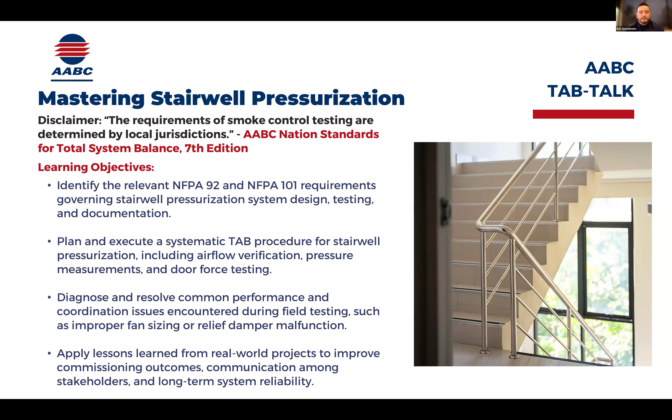What stair pressurization must do and why it is so important. This is a picture of the MGM Grand back in 1980. They had a fire, and my mentor, Michael Renovich, has always said, if you're ever going to be in a fire, you're going to want to be in Las Vegas. Why is that? Because out of this fire came national standards for smoke control. What they found in this fire is that 80 plus people passed away, and I think only about 15 or 16 passed away from actual exposure to flames. Everybody else passed away from smoke inhalation.

It is extremely important, as we found out with this fire and moving into the standards, that smoke control is the primary factor that we're trying to look at. When we're talking specifically for stairwells, what are we trying to do? We're trying to keep the smoke out of the stairwells because the stairwell is the egress in an emergency. So if we have an emergency, we have a fire, the stairwells are going to be the escape route for the majority of the occupants.

So we're trying to keep smoke out of there, trying to keep that clear so that they have a clear path to get out during the fire. The other things we're going to talk about too is keeping doors operable, and that pressurization should never make it too difficult for anybody to open the doors into or out of the stairwell.

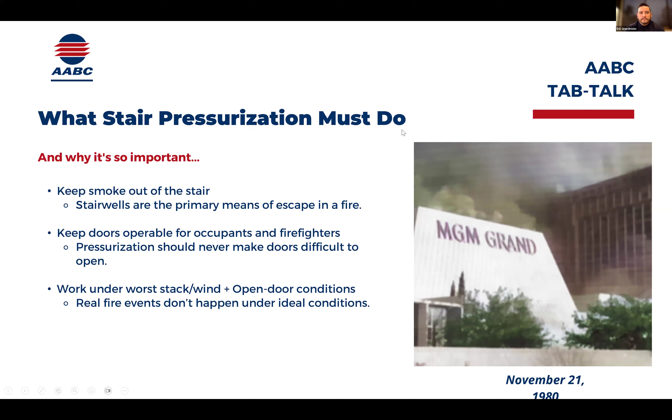So the NFPA 92 is a standard for smoke control systems. This is more of an engineering document, if you will - kind of a basis of design of what engineers need to be looking at as they're designing smoke control systems. We are going to be focusing in on just stairwell pressurization and kind of the TAB approach.

And so underneath just the stairwell for NFPA 92, we're going to be looking at required differential pressure across doors. We're going to be talking about door force limitations - where is that, how far can we go? Most enact a 30-pound door force, right?

But that's really broken into three parts: it's the break of the door hardware at 15 pounds, put into motion is going to be the 30 pounds, and then all the way open for 15. So the maximum we want to see in that whole process is a 30 pound limit.

Now, there are some ADA requirements that we've seen here in California that require 15 - you can only go to 15 per the ADA requirements. So that is now the new limiting factor in some buildings. We talk about the open door conditions - how many open doors is the system designed for, and airflow limitations.

So once again, this is not the code, guys. Just like ASHRAE 170 is not a code, this is more of a standard, what we're trying to design to. ASHRAE 170 is called a standard, so we're trying to design to that. In California, which is what I know mostly, the California Mechanical Code adopted ASHRAE 170 as Table 4A into their CMC. So we see that NFPA standards are adopted into a lot of local jurisdictions.

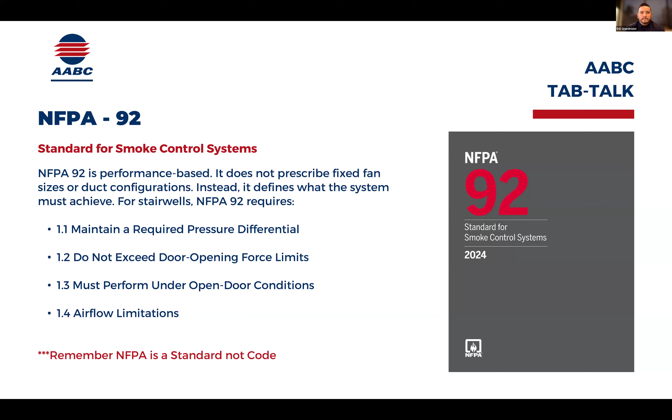So starting off on that differential pressure that we were talking about for each of the stairwells - they do have different requirements for sprinklered and unsprinklered systems. Sprinklered buildings require a 0.05 differential pressure from the corridor into the stairwell.

Now, we also have to take into account if there are vestibules. If there are vestibules, they require a 0.05 differential pressure across the corridor to vestibule and the vestibule to the stairwell. So we really need a total of 0.1 cascading pressures. Depending on the type of systems installed in the building, and also if you have vestibules or not, it changes the requirement we're looking at.

The other thing is this is different, and you'll see a lot of - I think IBC, and a lot of you may work in jurisdictions that have adopted the IBC.

IBC does have a maximum pressure requirement that they don't want to exceed, 0.35. NFPA does not actually show a maximum pressure. It just says you have to stay under your door force, so that's basically your limiting factor of how far you can go at a maximum.

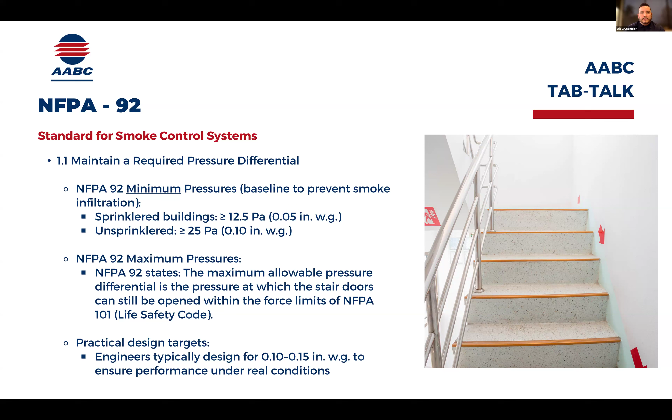We talked about this a little already, but the door force limitations and maximums that are set are actually by NFPA 101. NFPA 101 identifies the door force maximums, and 92 has adopted basically the NFPA 101 standard.

Recapping, most jurisdictions we're going to see that 30 pounds of force, and they break it into three factors: the unlatching or breaking of the hardware being 15 pounds or under, 30 pounds to start movement or set in motion, and then 15 pounds to fully open.

I've seen this tested in a variety of ways. I've seen some local jurisdictions, the AHJ, which is typically for us the fire marshal, come out, and as long as you go through the entire motion of opening the door and it doesn't exceed that 30 pounds of force, they say okay, you've passed.

I've also seen where you reset in each of these motions where they want to see you break it. If it's a panic bar, they want to see the panic bar break under 15 pounds, you show them the force, you reset. Then they want to see it start in motion to make sure that doesn't exceed 30 pounds, you reset, and once you get the full motion, they want to see that be 15 or under.

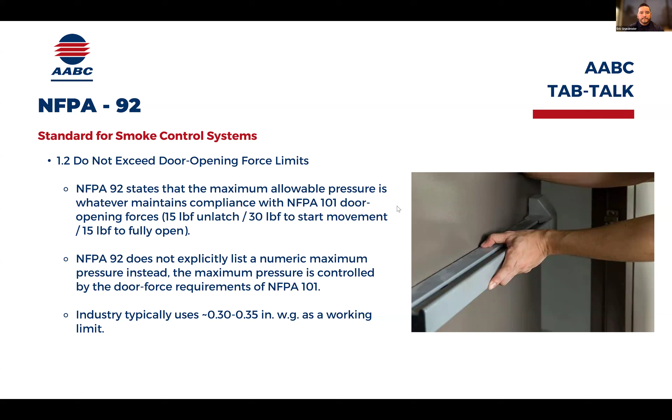One of the things that comes up is, what is the system designed to do? The rational analysis is usually done by a fire engineer. That's what we've typically seen. The fire engineer looks at the building, the requirements, local jurisdiction, and comes up with a smoke control plan.

Underneath that smoke control plan there are a lot of testing requirements done by the test and air balance contractor. They look at how many doors they're going to design the stairwell to be open at any given time. This is in theory though, because in most cases, if there's a fire, every single door of that stairwell is going to be open. No system I've seen to date can keep the pressure at 0.1 with every single door open, it's going to be kind of panic chaos.

So they design it with a criteria saying you're either going to have one or two doors open, and sometimes during testing they want to see, if we open one door, what happens, and can the system accommodate for that.

There's been some different ways we've seen that be accommodated. I had one instance where they tried to control the differential pressure from the stairwell to atmosphere based on a PID loop. That PID loop had to be very fast, and it was problematic to say the least, trying to maintain 0.1 with all the variables was very difficult.

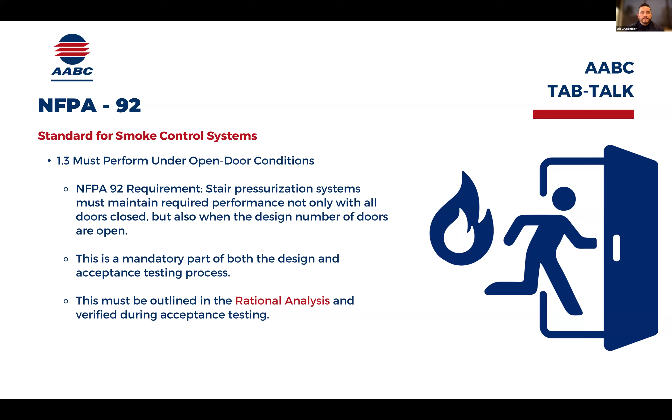So what is a rational analysis? This is what a fire engineer typically does - they go through the documents, look at the building, and come up with an analysis of what needs to be done. What are the requirements for smoke control within this building? How are we going to accomplish the NFPA requirements? They come up with a document that basically shows this, and it's given over to the local jurisdiction, in our case the fire marshal, depending on the building. Sometimes it's a state fire marshal that has to go through this plan and give it an approval. So NFPA 92 requires that they have this analysis for each building.

Over the years, sometimes we've been able to find it, especially if you're doing any kind of retrocommissioning or retesting. Sometimes it's difficult to find this analysis, but it's important that you try your best to find it because it's really going to show you how the system is designed and what we're looking to accomplish with the smoke control plan.

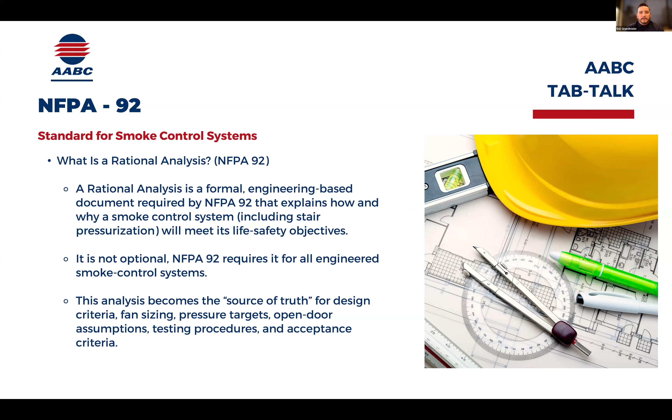There's also an airflow limitation they talk about in NFPA 92, and it's 200 feet per minute. In systems where I've seen this tested, it's not necessarily in the stairwell application - where I've seen it mostly tested is for smoke evacuation. You have to have makeup air for smoke evacuation, and sometimes they use doors that access the outside as their means of makeup air for the smoke evac fans. They don't want the air coming through the doors to exceed the 200 feet per minute because they don't want to create any type of turbulence or draw that would feed the fire.

So it's a limitation they're trying to keep slow as it comes in, to not disrupt what's going on, but also be able to use the smoke evac fans to get all the smoke out of the area. We're not going to talk too much more about that because it's really more pointed towards the smoke evac fans than it is about stairwell pressurization.

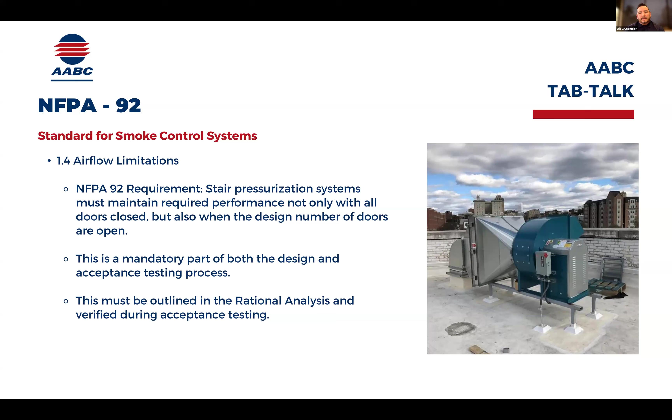We talked about this already, but just the one crossover from NFPA 92 to NFPA 101 is the door force requirements that they've given - it's the 15 pounds to unlatch, 30 to start movement, and 15 to swing fully open. And we went over that earlier.

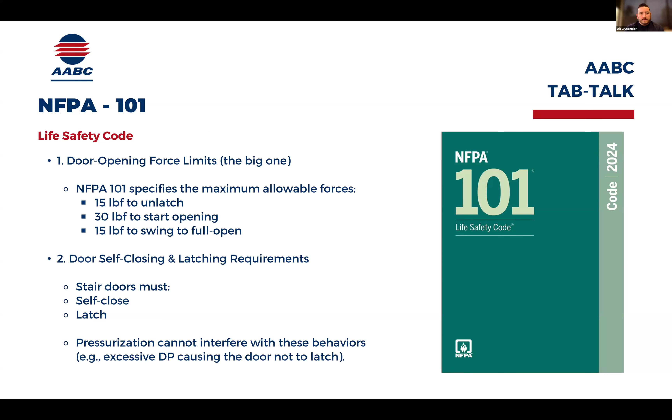So the systematic approach to TAB procedures - this is kind of the step by step. As you get involved in a project, what are the things you're going to be looking at? How are you going to go from each of these phases?

Now, I have a Rubik's Cube here. One of the things I've always used as an example for smoke control is that it's a puzzle, right? We're trying to put this puzzle together. There are different requirements that all adhere to the stairwell. A lot of times you're going to have to set that relief fan, set the pressure to the stairwell, go through cascading pressures and setting for your door forces. So there's this kind of puzzle that you have to put together. If anybody's ever done a Rubik's Cube, there's algorithms you can use to actually complete it. I've always looked at smoke control in that way - it's a puzzle, and there are algorithms we can use to get through it.

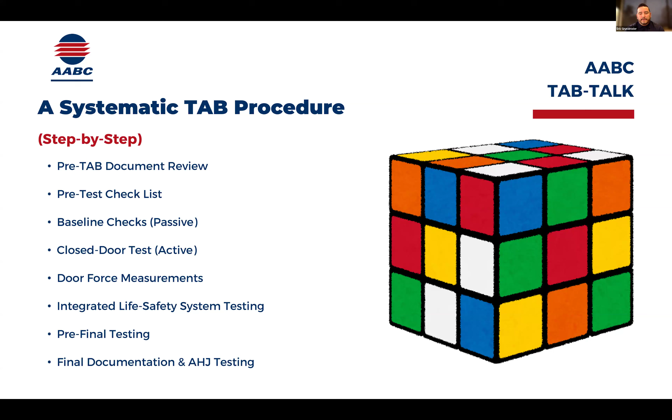And how does one twist and turn affect the other? Because as we'll talk about, if you set your pressures higher in your stairwell, that affects your door forces, right? So all those things play a part - they all interact with each other. We'll go through this step by step, what to expect, what to look for, and going through the process, especially from the TAB side and the TAB approach.

The first thing we're going to want to do is figure out what the system is supposed to do. We're going to want to go through the construction documents, the specifications, and look at the fire plan or the smoke control plan to see what we're needing to do. We're going to want to confirm the acceptance criteria, like the 30 pounds versus the 15-pound ADA requirement. What is being enacted? Those are some questions that definitely need to come up in the beginning.

We like to talk about those things early on with the team, especially the mechanical team, but we may also need to bring in the general construction team, because one of the things that always seems to be missed is the adjustable door sweep. Especially if you're working with a vestibule where you're going to have cascading pressures from the corridor to the vestibule to the stairwell, you need adjustable door sweeps. A lot of times that's missed because they're specking the door for operation, not thinking about smoke control.

So those are things you've got to talk through and make sure are in place, because you don't want to get to the end of the project, go to do the fire life safety testing and stairwell pressurization testing, and realize you don't have adjustable door sweeps. Then there's no way to create that cascading pressure. So those are things we're looking for as we go through the scope review.

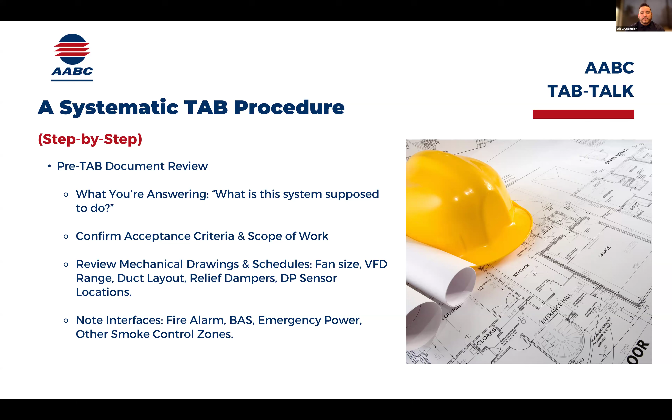This is a huge one for us: the pre-test checklist. As you're getting towards the end of the project and they start poking you about wanting to get stairwell pressurization started, having a checklist before you start is extremely important. It always seems like we get pushed—hey, we need to get stairwell pressurization and smoke control on the schedule. Can we start anything early? Can we start testing?

And you walk through the stairwells, and I've seen baloney cords going down the stairwells, every door propped open, missing glazing in the doors, door hardware not complete, electrical not finished, penetrations not sealed. All of these things affect what we're trying to do in the stairwell pressurization testing, so they really need to be complete. I always tell people, in the beginning, during those pre-meeting discussions at the start of the project, you need to bring up that the stairwell really needs to be 100% complete.

That is really what you're achieving. You're going to be one of the last tests that happen out on site because you need finished flooring. You need the thresholds installed. You need all penetration sealed. You need all the glazing installed. You need the door sweeps on.

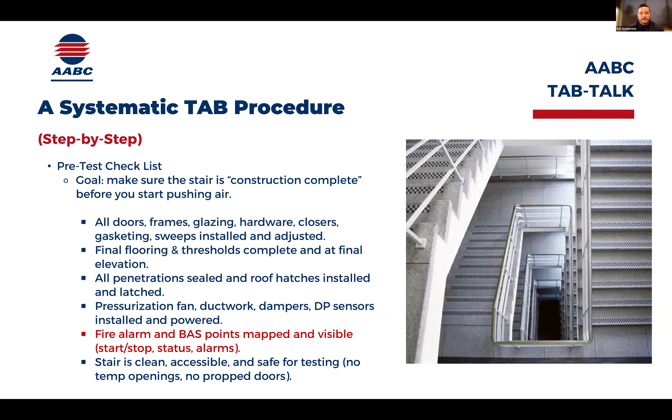Because they're going to complete things and it's going to change your readings. So really having that stairwell 100% done needs to happen, and you really need to work with the team to have that checklist in place to say these are the things that have to happen in order for us to get started. So here's some things that we do that we look through for our construction checklist.

We're looking for integrity. We're looking for completeness. We're looking for housekeeping. Is it clean? Have they taken the baloney cords out? Is nothing draping through the stairwells? We're looking for door installation, closer operations.

Are the seals installed? A lot of times it seems that the egress door, the door at the very end that leads out into the street, is one of the last things that are installed. I don't know why that is, but on a lot of our projects it seems like they always wait till kind of the end to install it. So there's always a plywood door there.

And I've been asked many times, well, can we just seal that up and put some plastic over it in order to start our testing? And really the answer should be no. I've tried it both ways, I'll be honest with you. I've tried to be the team player, let's put some plastic up. But we're always going back and redoing a bunch of our work because we didn't have that finished condition.

As we just talked about, other things that we need: power to the equipment. We need to be able to interface to start and stop it, and be where the controls, where the BMS is. Now being a team player in all of this, really the controls is kind of outside of our scope. Whether the sequences are done and the BMS is ready, or more of the controls of the fire life safety system is ready to go, because there's a lot of workarounds.

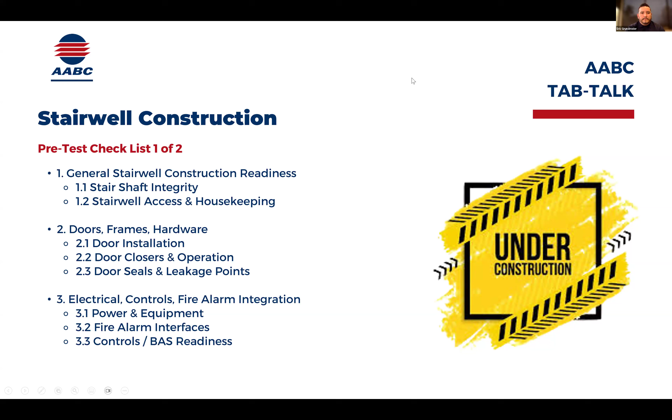Some last things we talked about a little bit, but just mechanical readiness: are the dampers installed, the ductwork, and really what's the condition of the building.

I promise you, if you jump in early, you make them happy by saying hey, we'll get started early. You're going to come back and do a lot of retesting because as that condition changes, as they seal up the stairwell, as they do painting, caulking, penetration sealing, put in thresholds, all of those things, your readings are going to change. You're going to be resetting fan speeds, resetting doors, and changing door sweeps a lot.

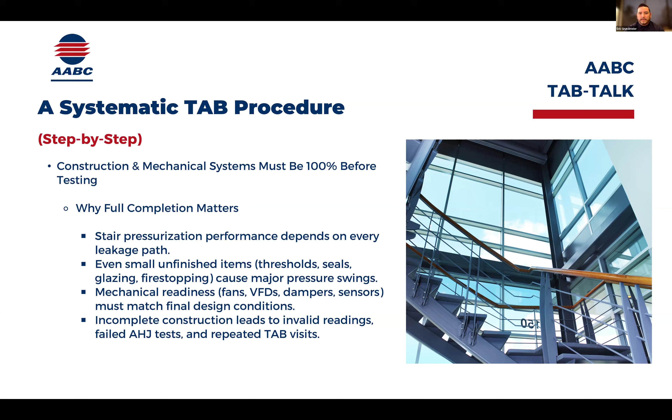So the next part of it, once you get through your checklist and your checklist is complete, now your stairwell is 100% ready. You're ready to start the first part of the testing. For us, we always start with a passive test.

We want to go through the stairwell system and see what our baseline is. This is with the stairwell pressurization system off, and we go floor by floor, taking door forces at the time. Typically we get the general construction team involved, we ask for whoever adjusts the doors to come with us, and we go floor by floor checking the door forces.

A lot of times the door forces fail not because of the pressure being applied by the stairwell system, but because there's a mechanical issue or the adjustments weren't set correctly at the beginning of the testing.

So we like to go through and see where we're at on each of the door closings. In this condition, each door has to be able to open and fully close on its own. There are also limitations on how fast it has to close, looking at certain timelines for if you open a door fully, how fast can it close, because what we want from a smoke control standpoint is the least amount of force in the actual operation of it.

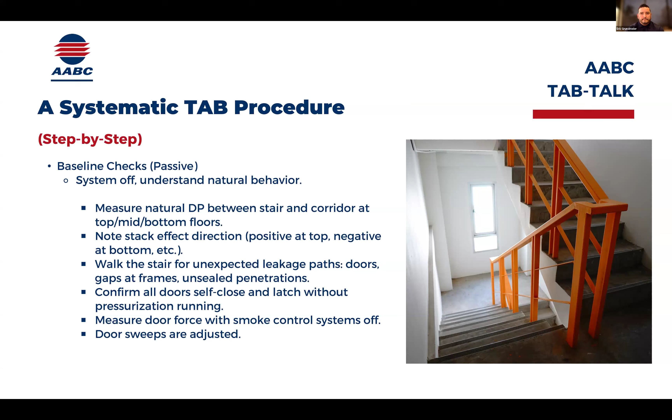So then we're moving in. Once we go through all of it, our checklist is complete, and we've done our passive testing. All the doors are now adjusted with the least amount of pressure to close. Then we can go into our active tests, starting up the fans and going through setting pressures.

Like we talked about earlier, if you have cascading pressures with vestibules, we're looking at 0.1. If it doesn't have vestibules but does have a sprinkler system, you have 0.05. If you have no sprinkler system and no vestibule, then you're looking at 0.1. If you set directly to 0.1, I promise you will have a very difficult time getting every single door to hit that differential pressure.

So we typically like to extend that to about 0.15. We've even gone a little above that so we have some play to ensure we're meeting that minimum, because remember, that's a minimum differential pressure limited by your door forces. With 30 pounds of pressure typically you can even go higher than that and be okay.

You could have 0.1 pressure across each door and you'd probably be okay with 30 pounds of force to open that door. But if you're getting into ADA requirements that require 15 pounds, you're going to want to limit your pressure as well.

So now we're checking things, in this condition, do the doors fully close? One of the things that happens with the egress door at the bottom is that it typically swings out. And when you have that pressure set to 0.1 and that door swings out, it has a very difficult time closing. So in the past, this is also one of the things you may want to check during that pre-construction document review: what is that egress door operation?

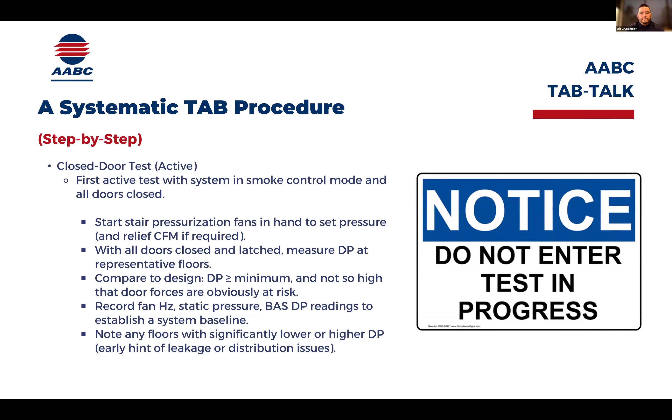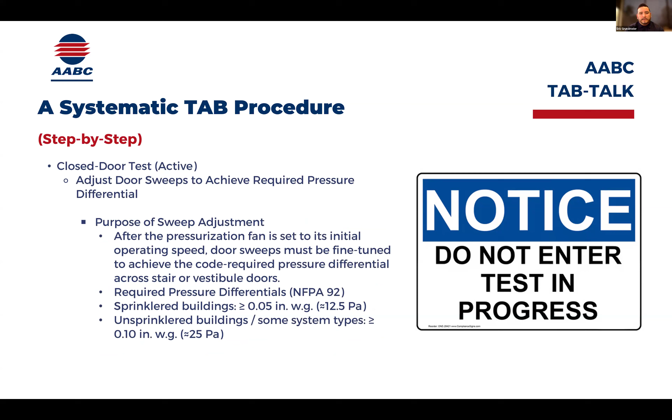Underneath the closed door test as well, this is when we're going to make our door sweep adjustments for that cascading pressure, just like we talked about. So once we have the pressure set, we're going to go through and adjust our door sweeps to ensure that we have that cascading pressure meeting those differentials.

Once those pressures are set, we don't want to start testing under an alarm condition until we have our pressure set. Then we'll go through and start doing our door force checks. We'll record those, making sure that they're not exceeding the maximum amount of 30 pounds.

One other thing to keep in mind is that in IBC, if it's adopted, they do require a relief of 2,500 CFM. Now, I've been in situations where it is required as a relief of 2,500 CFM, and I've also had cases where it's not required, either grandfathered in or out of state where they don't have that requirement.

But depending on whether you have to set that 2,500 CFM of relief at the top of the stairs, that's going to come into play when you're setting your pressure. So you're going to have to set that 2,500 CFM of relief and get your pressure set at the same time. And typically they have barometric dampers on the relief, and they'll be weighted.

So if you have too much airflow and not enough pressure, then you can dial back the weights to increase the pressure in the stairwell, or vice versa. And then you're just going to have to play with the speed setting until you get both of those set.

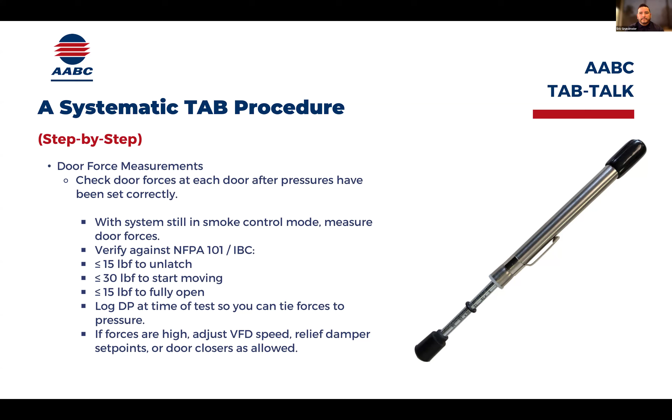Once you get all of those things set, once you get all your paperwork complete, you go through and do all the performance testing, you get all your set points fine-tuned. One of the things that we typically have done, and is requested by the construction team, is that we get with the fire engineer and do a dry run of the testing.

So this is now where we may have been going through and doing our testing with the fan in hand. We are now moving into a point where we're going to activate it by the system. So we're going to go ahead and introduce smoke, go through our testing, and basically make sure that we are ready for the AHJ to show up, and we're going to have no failures. So that's the next part.

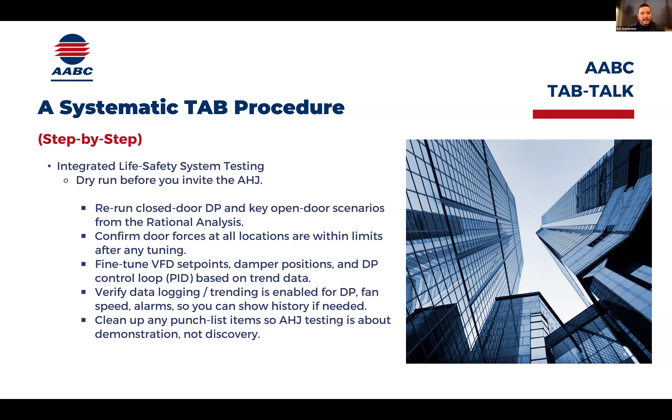And then the last part of it all is that we're going to do our final testing. We're going to turn in our final documentation. We're going to do our final testing with the AHJ and the fire team, the fire engineer, and the controls contractor. We'll go through and check all of the pressures, all the door forces.

In some cases, you're going to have smoke evacuation as well. So they're going to want to see differential pressure from the floor above to the floor in alarm, and the floor below to the floor in alarm. Those are the types of things you may see, but those are going to be specifically requested based on the smoke control plan. And then we turn in our final report and that gets approved.

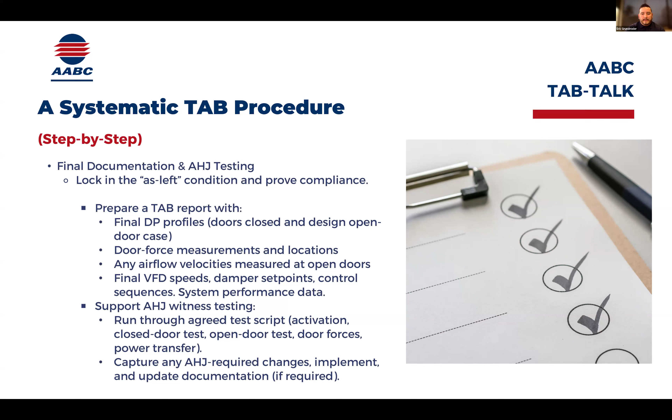So some typical things we have found, lessons learned over the years, is the schedule impact and pressure to get started too early. They want to get sign off and condense the schedule, but if the stairwell is not ready, you're not saving time, and that's hard to explain to the construction team. If your stairwell is not 100% done, I promise we're not saving time because we'll just have to go back and do rework as construction is completed, as doors are finalized, as glazing goes in, as final flooring goes on - it's going to change our testing. So working with them to understand what they need to do to complete that stairwell 100% so they can get started is important.

Some other things we've run into: typically stairwell pressurization fans are oversized. It's because they don't want to miss on the under side, since there are variables like how much leakage is out of that stairwell. So they typically oversize the fans, and we have to work with them - does it have a VFD? Hopefully it does, that's now kind of normal operation for everybody, which is easier to dial in. But we've also had to change sheaves and make other modifications to fans in order to get the correct CFM. So that's just something to be aware of.

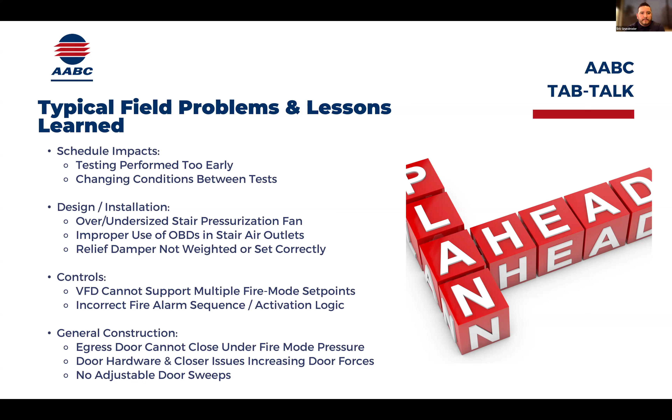So it looks like we're getting to time here, guys, and wanted to leave about 15 minutes for a Q&A session. These were just kind of the highlights of what we just talked about, so I'm going to go ahead and skip through those, and we'll get to Q&A.